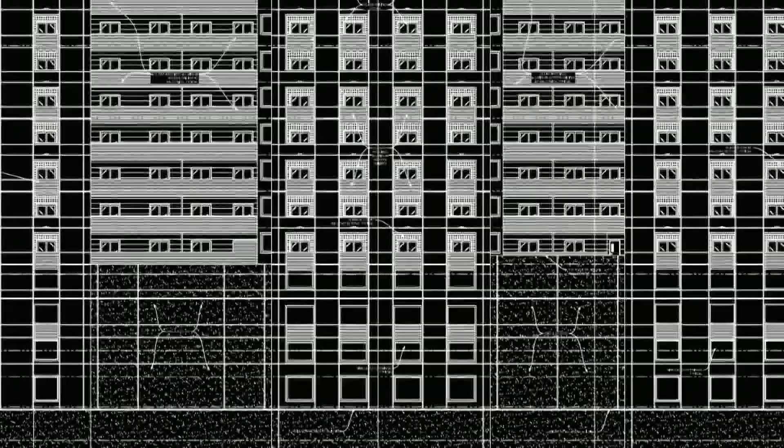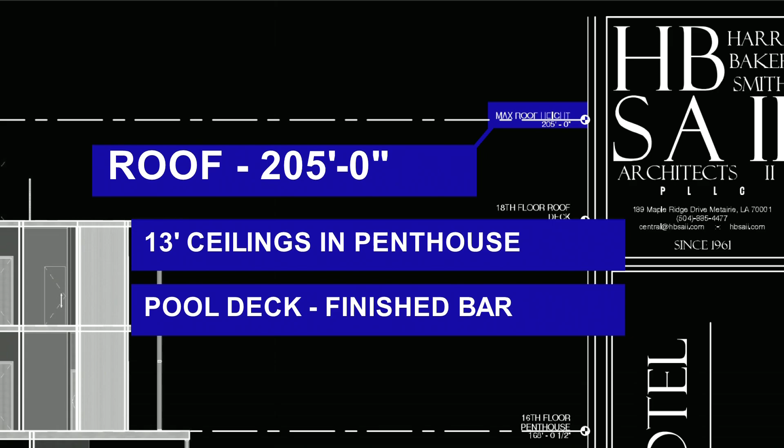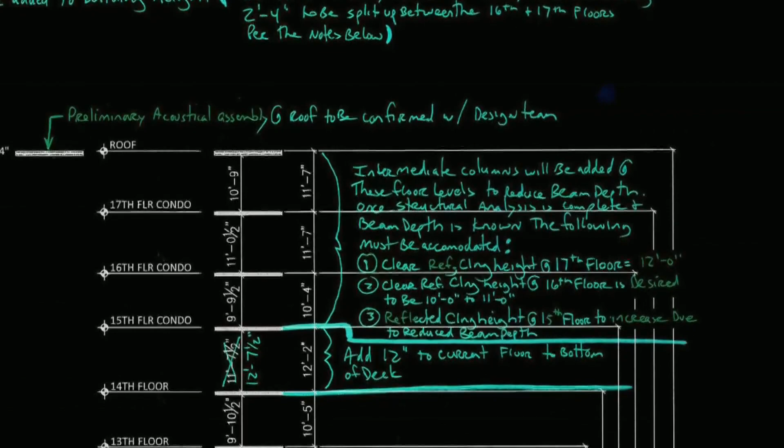And originally, that was the plan Kailas submitted to the city. But after Hard Rock signed on to the project, Kailas called for big changes. A 205-foot building with 13-foot ceilings in penthouse apartments and a pool deck and finished bar on the 18th floor rooftop. Palmer said she would not agree to let the building go above the 190-foot limit. So on March 7, 2018, the construction team laid out a plan to keep the roof at 190 feet, but also to keep taller penthouse ceilings by making the steel beams that support the floors thinner, much thinner.

So one of the things they did was use shallower beams, which they went from 21 inches deep down to 10 inches deep. The idea was this. Thinner beams supporting the floor above would allow for higher ceilings below. 21-inch thick beams would let the builders hang the ceiling here, but 10-inch thick beams would give them an extra 11 inches of headroom. But thinner beams also have a major downside.

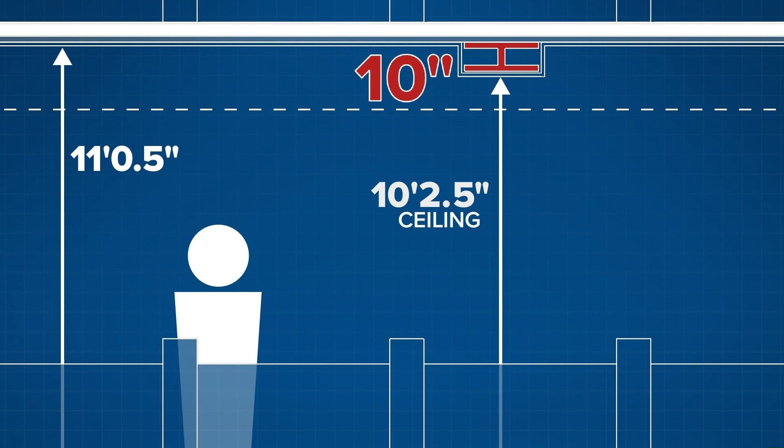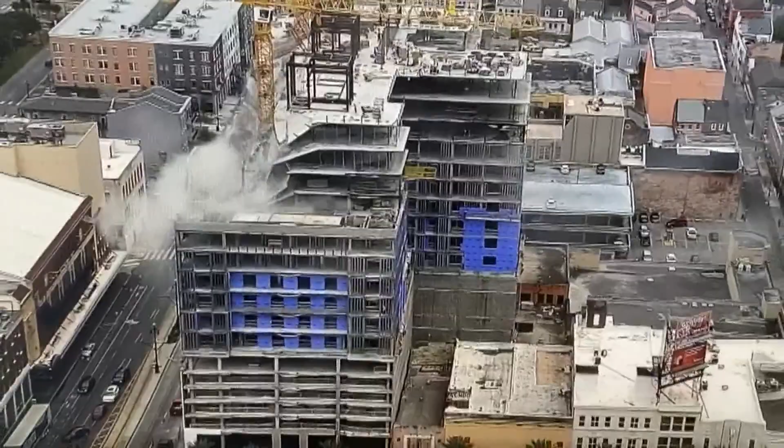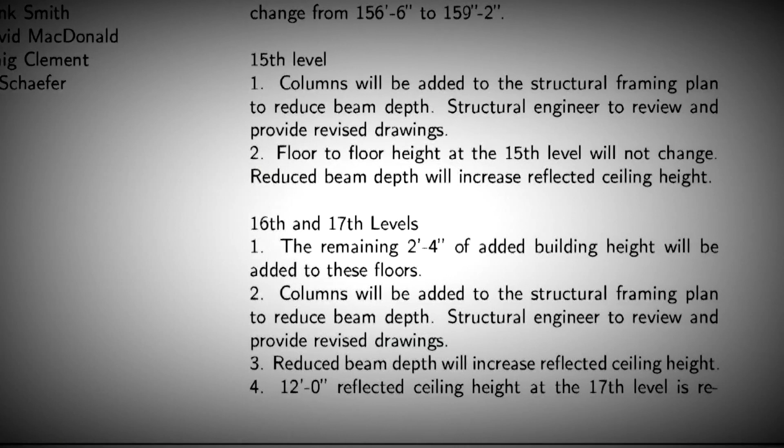We asked 2 independent structural engineers to review the internal construction documents we obtained from civil lawsuits. Both said the thinner beams likely had a major impact on the strength of the building. California-based engineer Michael Bradbury called our findings a potential smoking gun for investigators looking into possible criminal negligence. This is potentially a significant discovery, am I right? Very significant discovery.

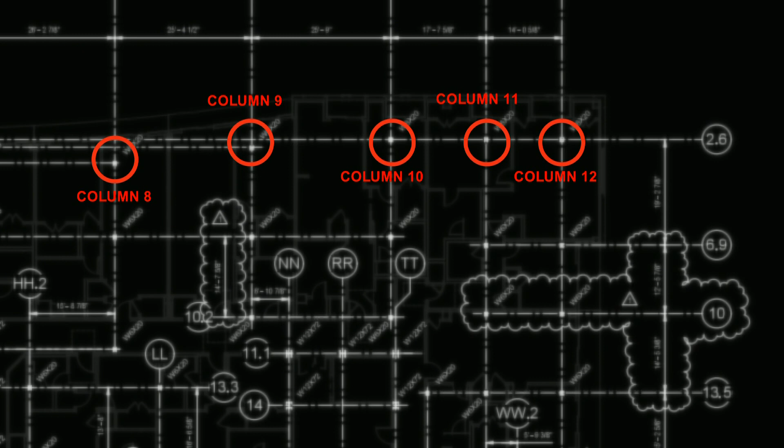This document shows the builder's plan to offset the impact of thinner beams by adding more steel columns. But we compared blueprints from before the change with the plans the construction crew was following in October 2019 when the building collapsed, and only 1 extra column was added to the 16th and 17th floors along Rampart Street. That gave them 12 columns along that edge. Bradbury said they would have needed at least 24 columns of that same size to properly support the floors above. I was really shocked to see how few columns they added.

And like the beams, the columns they ended up using were also significantly smaller than what was in the original plans. All 12 of the columns installed along the Rampart Street edge were W6x20s, 6 inches wide with a weight of 20 pounds per foot, while the 11 columns in the original plans were all W10x49s, 10 inches wide and 49 pounds per foot.

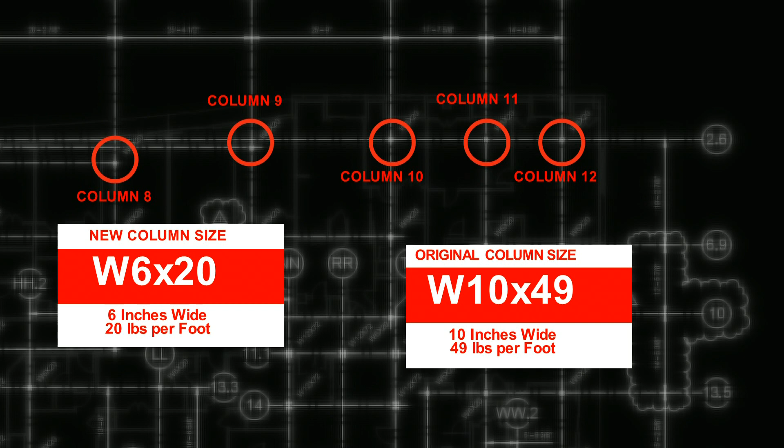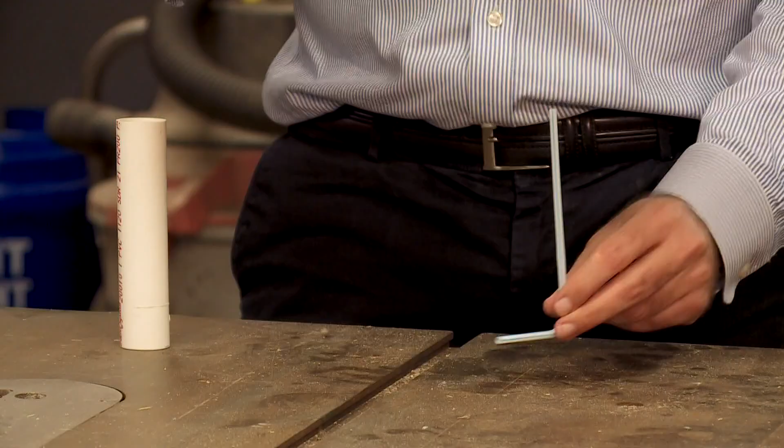Think of it like this. If you take a board and you place it on some PVC pipe, the pipe will hold just fine. But if you take something smaller and flimsier like a straw and place the board on top, the straw collapses. Now Bradbury says that the W6 columns used at the Hard Rock were way flimsier than the W10s. The W6 was 1/8 of the stiffness as the W10 that they originally put in the pricing set. So that is a big problem.

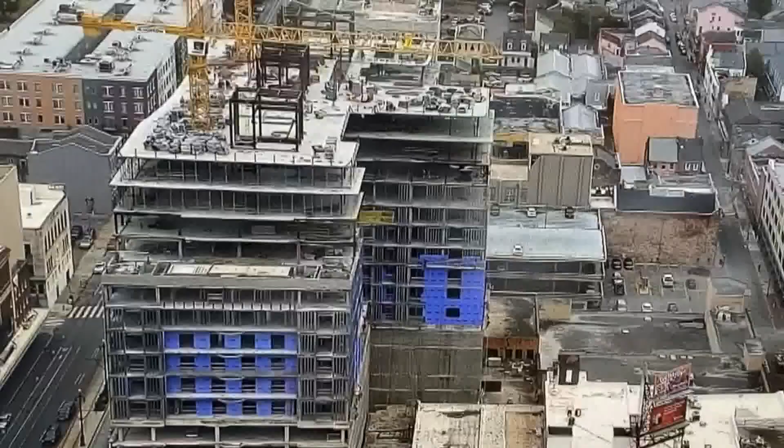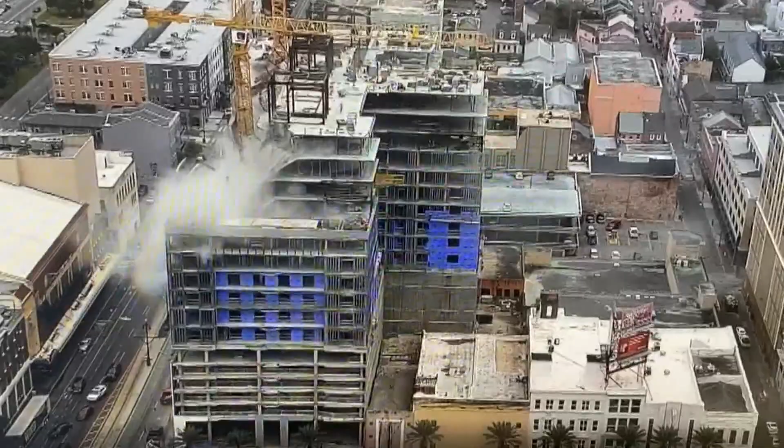An especially big problem when they poured the last heavy concrete floor on top of those columns on October 5th, 2019. One worker took video of temporary shoring poles buckling under those floors on October 10th. And on October 12th, it all came crashing down. Video obtained exclusively by Channel 4 shows the collapse starting near the corner of the building closest to Rampart and Iberville, right where the thinner beams and columns were used to support the 17th and 18th floors.

So who is ultimately responsible for this? The Federal Occupational Safety and Health Administration has already issued violations against the project engineer and the steel contractor. Citations against engineer James Heaslip allege floor beams on the 16th floor were underdesigned for the loads that they would need to support, and structural steel connections were inadequately designed. OSHA also cited Hub Steel, saying steel beams on the 16th floor were not connected to columns on the 15th floor as required and did not meet the specified load requirements.

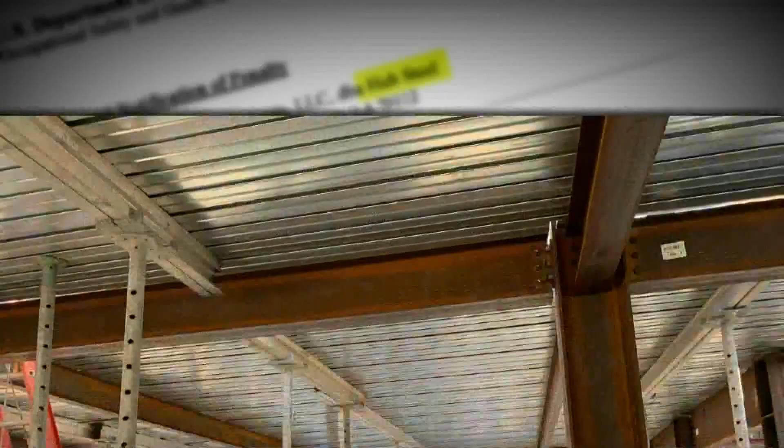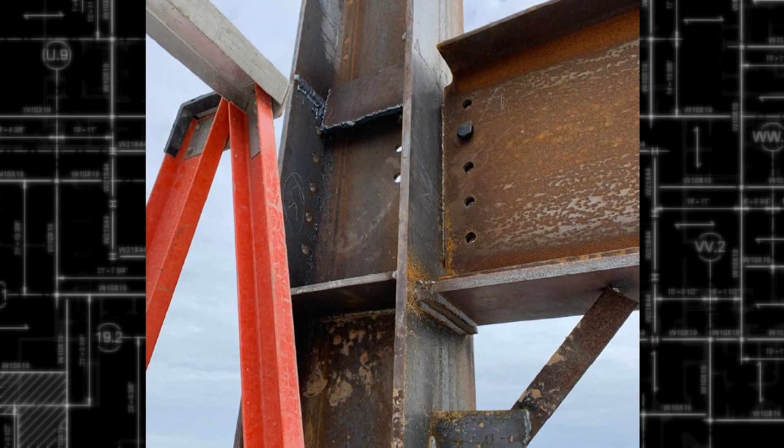We obtained photos taken inside the construction site before the collapse. Here are handwritten notes indicating some beams were shorter than what the plans called for. OSHA's investigation found that some of the bolt holes connecting beams to columns didn't match up and were welded together instead. But the biggest issue for OSHA's engineer was the thinner beams. He found 81 beams on the 16th floor that were too small to handle the weight of the top 3 floors.

Walter Zehner, an engineer hired by Kailas, says the change to the penthouse ceilings that resulted in thinner beams under the 17th and 18th floors did not cause the collapse. He says the problem was all with the beams under the 16th floor. The beams on the 16th floor were the same size as the ones on all the floors below. It was carrying its own floor plus the 2 additional floors above and the roof. So they were like 300% overstressed, based on my calculations.

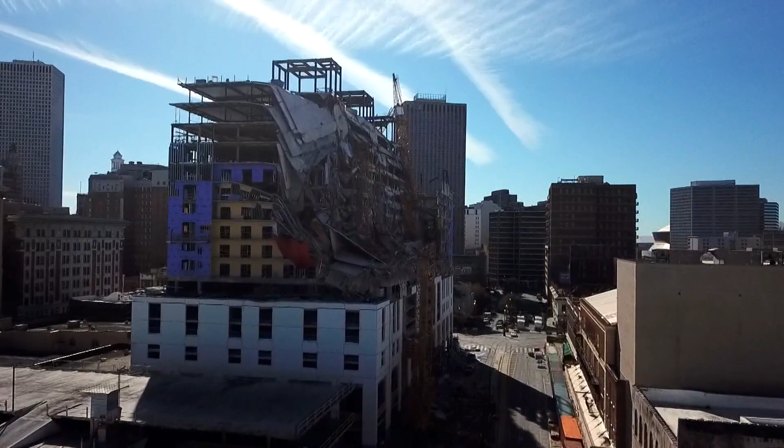It's still the engineer's responsibility to design a safe structure. And in the end, Bradbury says that's what this case comes down to. That's what he's responsible for. The engineer is to make sure it doesn't fall down. Heaslip and Hub Steel are both contesting their OSHA violations. District Attorney Jason Williams says he wants OSHA's full investigation report so he can file possible criminal charges against those who caused the collapse. But OSHA won't release its final report until all appeals in the case have been heard. Heaslip's appeal won't be heard until July 26, 2022.

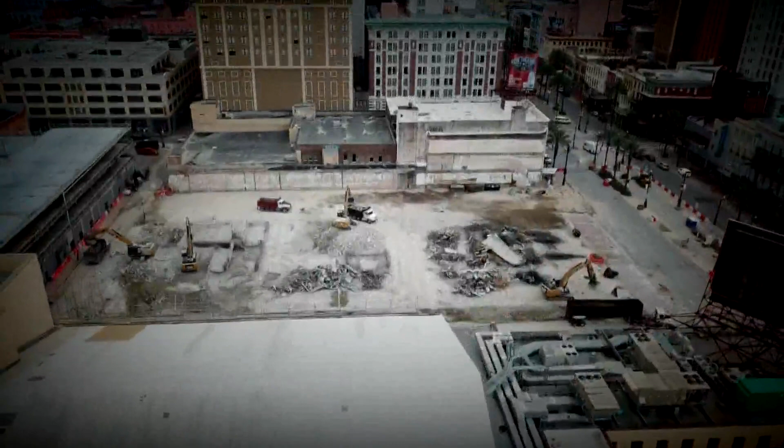David Hammer, Eyewitness News. So we reached out to Heaslip Engineering and Hub Steel to specifically ask about the reduced beam and column sizes. Hub Steel did not respond, but James Heaslip sent us the same statement that he sent the last time we did a story, saying, quote, "We have denied and are contesting all allegations of fault and negligence asserted in the legal proceedings related to the Hard Rock Hotel collapse. And we stand behind our company's track record of designing projects that meet applicable engineering standards."